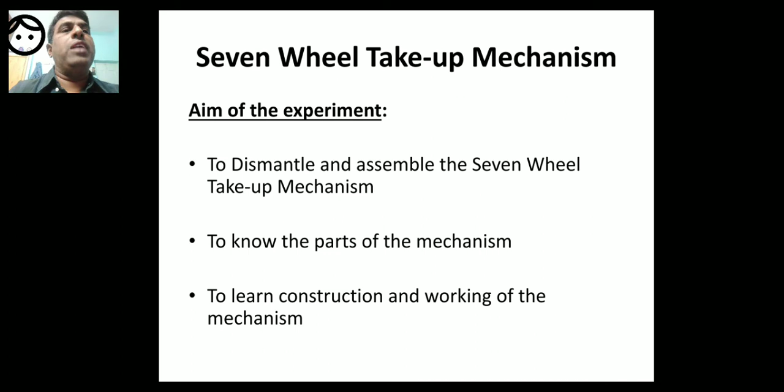So, dismantle and assemble the seven wheel take up mechanism, know the parts of the mechanism, learn the construction and working of the mechanism.

Principle of the experiment: in this positive type of take up motion, the cloth roller driven by means of a train of wheels draws the cloth forward at a regular speed with uniform pick spacing system. This is the principle of the experiment.

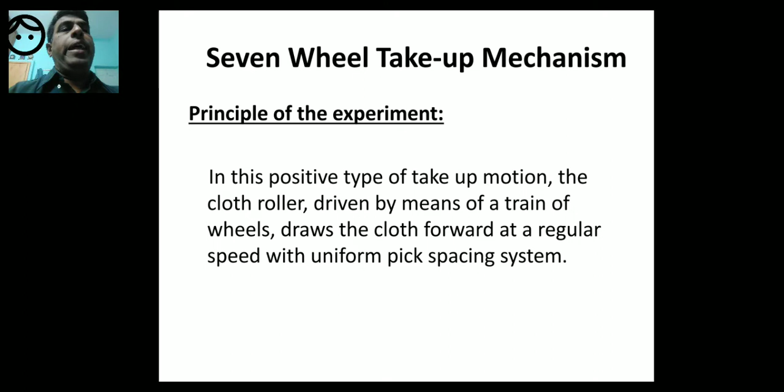So you have to understand some points in this positive type of take up mechanism. There will be a cloth roller which is driven by means of a train of wheels, that is seven wheels. It draws the cloth forward at a regular speed, a uniform speed, with uniform pick spacing system - the pick spacing will be uniform. So this is the principle, involving regular speed and uniform pick spacing system.

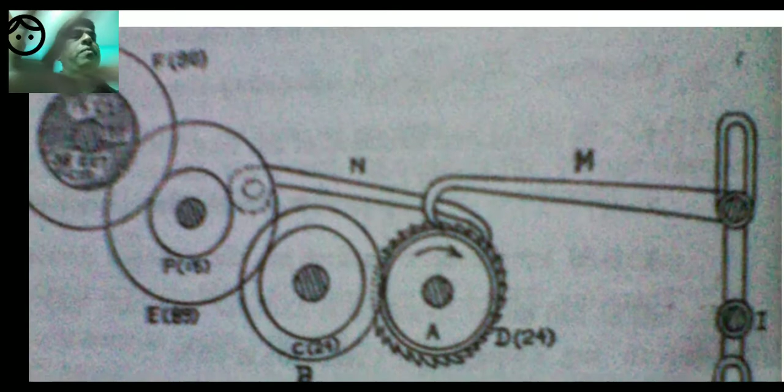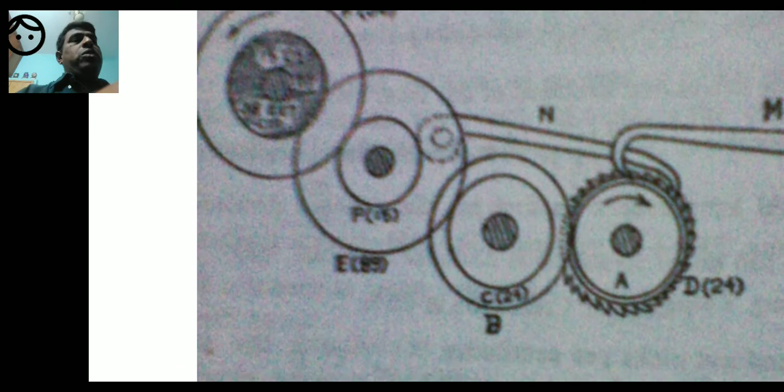So please see the parts. I will show you another picture where there will be a clear understanding of the parts. So these are the train of wheels, and M is the pulling pawl, N is the retaining pawl, and there will be 7 wheels if you observe clearly.

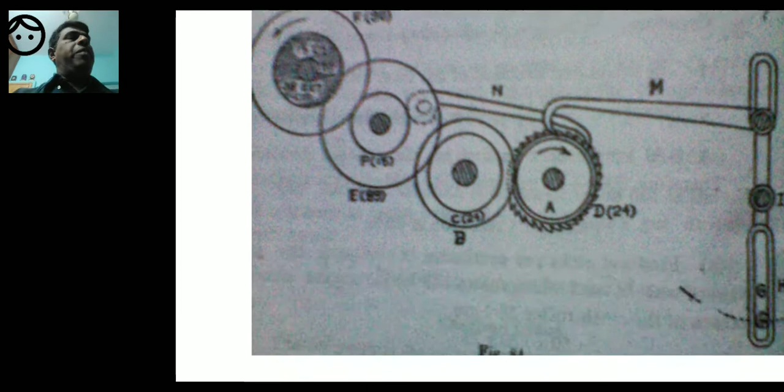I will show you another diagram. So take up lever, I is the take up lever. Let us go to the next diagram. So this is the next diagram.

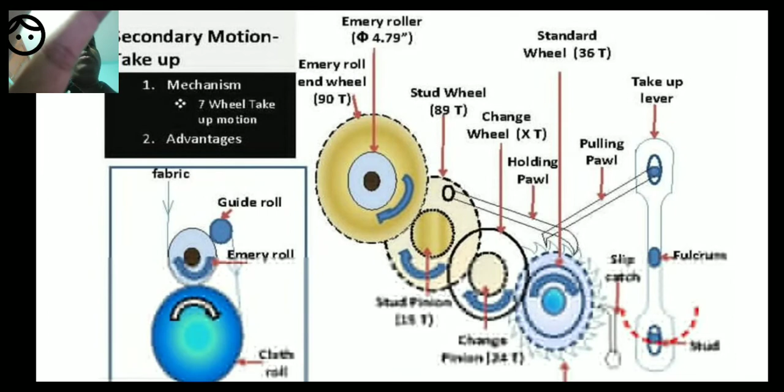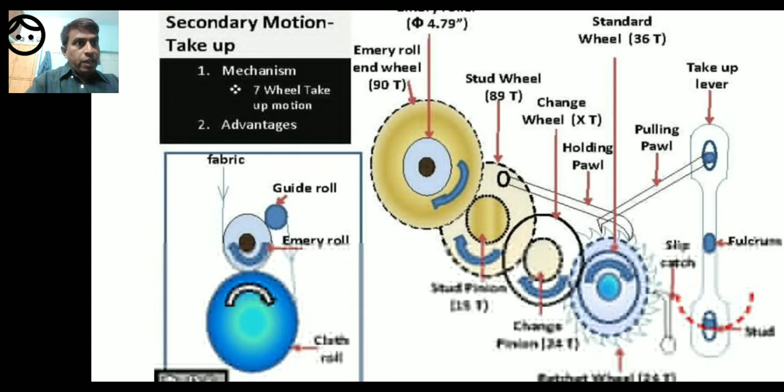So please see that, now you will see all these wheels. I am starting from the right hand top corner. Please see, take up lever, and then fulcrum. The below one is stud and slip catch, pulling pawl, holding pawl or retaining pawl, standard wheel which is of 36 teeth.

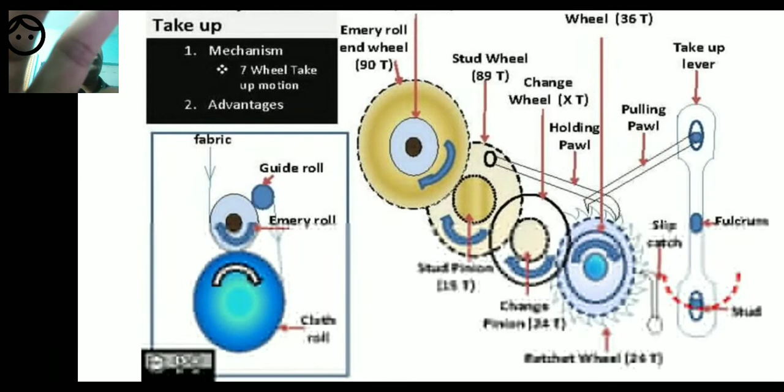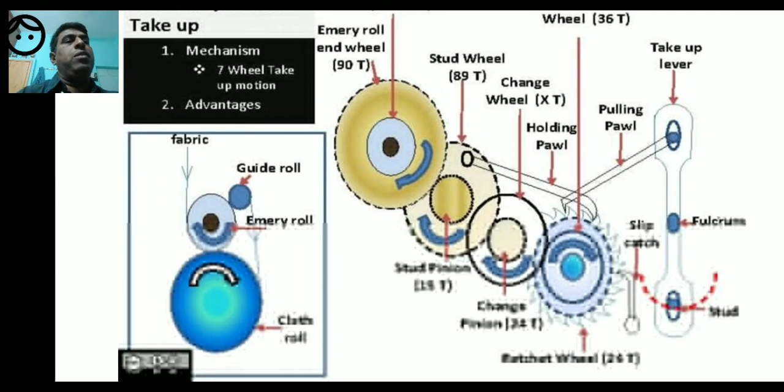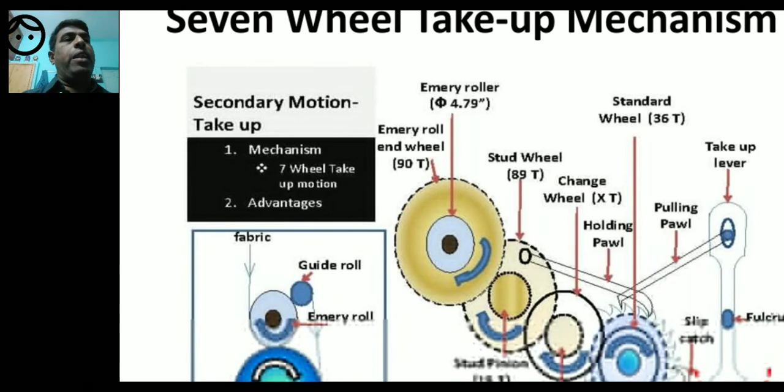Ratchet wheel, 24 teeth, change pinion 24 teeth, change wheel xt, so it means that multiplied by the change pinion. Stud pinion, stud wheel 89 teeth, stud pinion, I can't see this, so it is around 15 teeth. Emery roller diameter of 4.79 inches, emery roller end wheel 90 teeth.

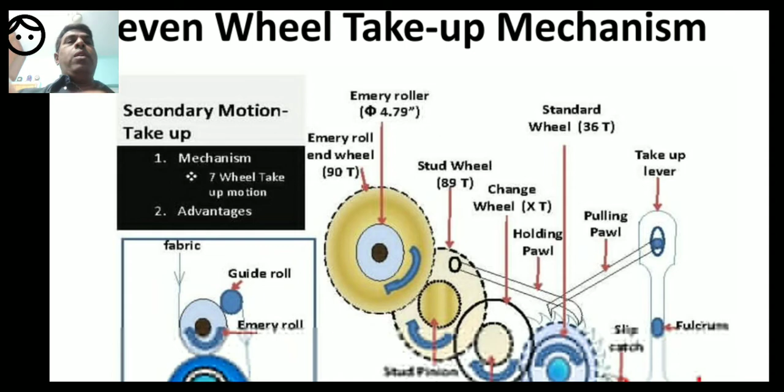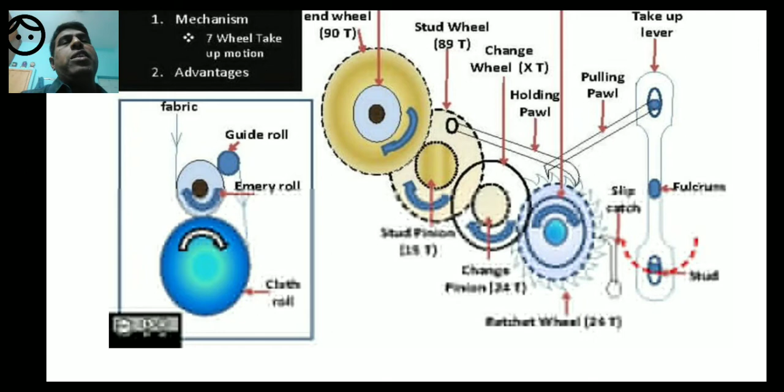And you see in this block diagram, the emery roller is there, and from the emery roller it goes on to the cloth roller with the help of the guide roller. The fabric passes on to the emery roller, and then after passing through the guide roller it passes to the cloth roller. So you may say, sir, where is the cloth roller here? That's why in this block diagram there is a small block where the cloth roller is given.

So the emery roller you have seen in the main diagram, and the emery roller is connected to the cloth roller via the guide roller. So please observe the parts. Take up lever, fulcrum, stud, pulling pawl, next holding pawl. Holding pawl can also be called retaining pawl.

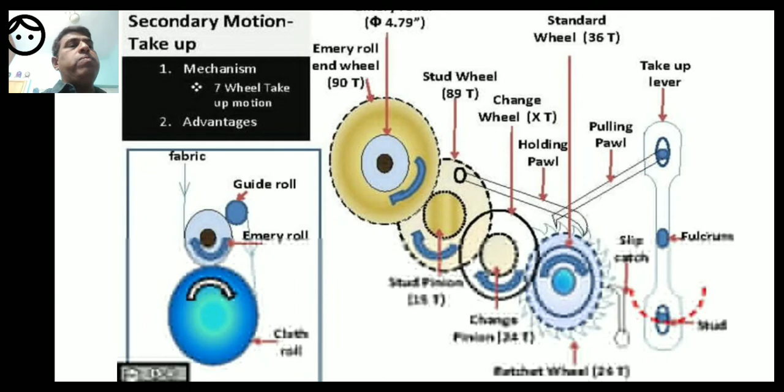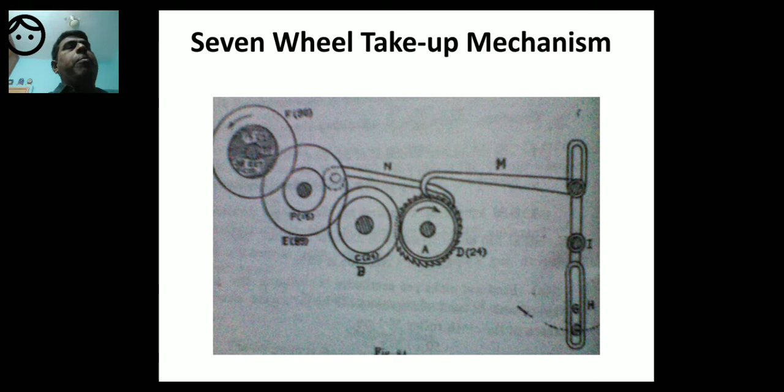Now we will talk about the wheels only. First, ratchet wheel, 2 standard wheel, 3 change wheel, 4 change pinion, 5 stud pinion, 6 stud wheel, 7 emery roller end wheel. These are the 7 wheels. In this diagram also it is similar, but this is a good diagram. So let's go with this.

So what are the 7 wheels? Ratchet wheel, standard wheel, change wheel, change pinion, stud wheel, stud pinion, emery roller end wheel, and on the emery roller end wheel there is an emery roller, which in turn is connected to the cloth roller. So these seven are wheels, and the emery roller is another roller. It's not a wheel. Emery roller is different. Emery roller end wheel is different.

So the emery roller end wheel is the seventh wheel in the seven wheel take up mechanism, and you have observed the number of teeth. Holding pawl and pulling pawl are two important points, and slip catch, we will study about slip catch also in the coming notes. The pulling pawl pulls like this, each one tooth, and the retaining or holding pawl will stop.

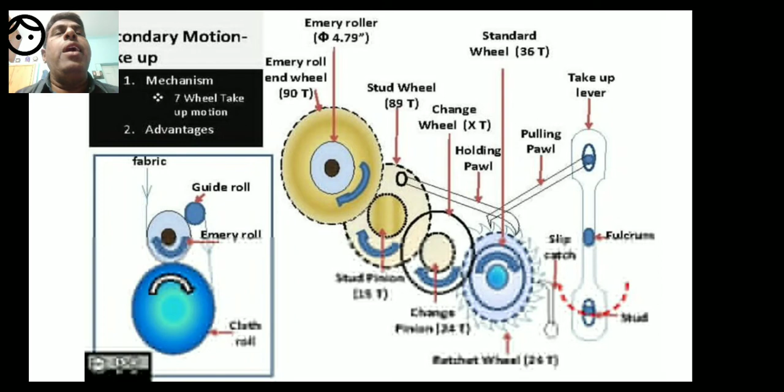Suppose the pulling pawl pulls one tooth, then the retaining pawl or holding pawl helps so that not more than one tooth is pulled. That is the function of the holding pawl or retaining pawl. Pulling pawl and holding pawl function together so that uniform or regular speed is maintained and uniform pick spacing is maintained. So we will study all these things. So one more time observe.

Emery roller end wheel. On that is mounted the emery roller, and in the block diagram on the left hand corner, the emery roller is connected to the cloth roller via the guide roller, through which the fabric is wound onto the cloth roller. So this is the complete picture of the take up mechanism.

Now construction. The motion to the take up starts at a stud fixed at the bottom of the sley sword. So at the bottom of the sley sword, right hand bottom corner, that is the stud. So observe, that is the stud. The motion to the take up starts at a stud fixed at the bottom of the sley sword. The stud is in the slot of the monkey tail lever or take up lever and carries a pulling pawl at its top end.

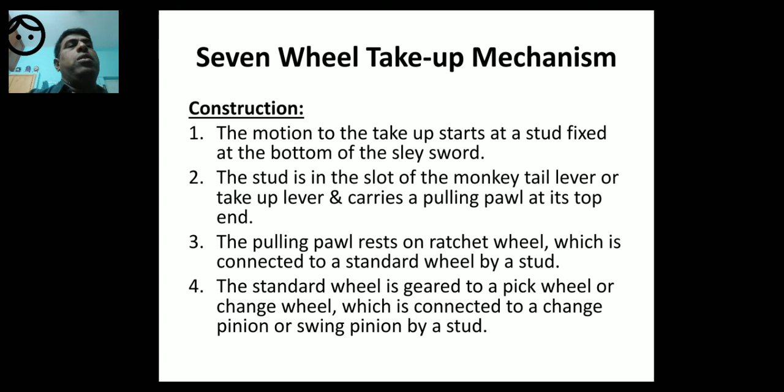So on the ratchet wheel there are three things: pulling pawl, holding pawl and a slip catch. All the three are present on the ratchet wheel. A holding pawl and a slip catch rest on the ratchet wheel. This is written in the 7th point, and in the third point it is written that pulling pawl rests on the ratchet wheel. So you can observe that a holding pawl and a slip catch rest on the ratchet wheel.

8th point. Cloth is drawn forward and passed over the emery roller, guide roller, and finally onto the cloth roller. The emery roller has frictional contact with the cloth roller. So cloth is drawn forward and passed over the emery roller. This I have shown you in the block diagram. So here the cloth is drawn forward through the emery roller and guide roller and cloth roller. So you can see that blue color cloth roller. So that's what he says.

Cloth is drawn forward and passed over the emery roller, guide roller, and finally onto the cloth roller. The emery roller has frictional contact with the cloth roller. Emery roller and cloth roller have a frictional contact with each other. Working.

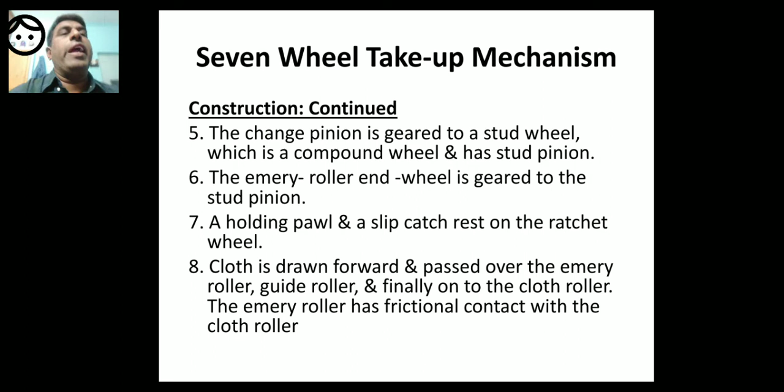I am getting tired. The sley moves forward during beat up. So the stud moves the bottom portion of the monkey tail lever forward. The pawl moves backward due to fulcrum and pulls one tooth on the ratchet wheel. From the ratchet wheel, the motion is transmitted to the emery roller through the train of wheels.

So the sley moves forward during beat up. So what is the function of the beat up here? After beat up, the last laid weft is pushed into the fell of the cloth. So after the beat up occurs, the cloth is drawn onto the cloth roller by the pulling action of the cloth roller. So the sleigh moves forward during beat up.

So the stud moves the bottom portion of the monkey tail lever forward. So by that motion, the bottom portion of the take up lever or monkey tail lever moves forward. The pawl moves backward due to fulcrum and pulls one tooth on the ratchet wheel. The pawl moves backward. Which pawl? Pulling pawl. The pawl moves backward due to fulcrum and pulls one tooth on the ratchet wheel.

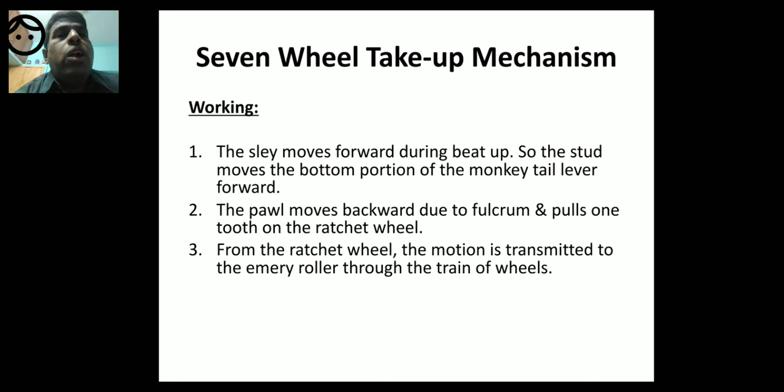And then from the emery roller end wheel, it moves to the emery roller, and then because of the frictional contact of the emery roller and cloth roller, with the help of the guide roller, the cloth is wound onto the cloth roller. So I will explain one more time anyway. The cloth roller, which is in frictional contact with the emery roller, rotates and takes up the cloth. So you might have understood the fourth point.

The cloth roller is in frictional contact with the emery roller. So the train of wheels ends with the emery roller end wheel, and as the emery roller end wheel rotates, the emery roller rotates, and because of the frictional contact of the emery roller and cloth roller, the cloth roller takes up the cloth.

Next point. The holding pawl holds the ratchet wheel to avoid overturning or slippage of the ratchet wheel. So please see this. The holding pawl or retaining pawl. There are two pawls, P-A-W-L. Holding pawl and pulling pawl. Holding pawl is also called retaining pawl. So pulling pawl pulls one tooth, whereas holding pawl holds the ratchet wheel to avoid overturning, so that it won't run more than one tooth.

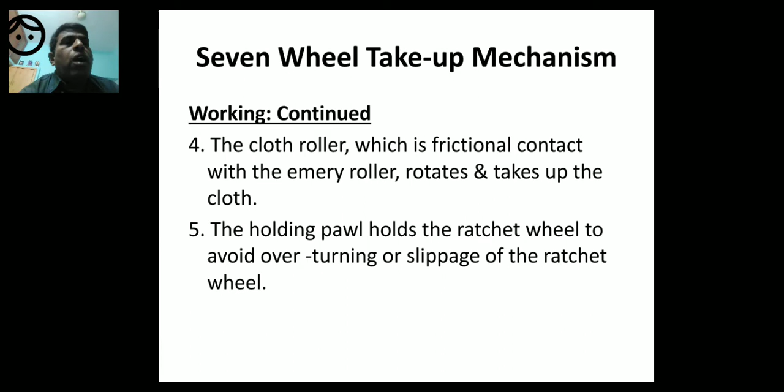So coming to settings, we are almost ending the class. Settings. The greater the number of teeth in the change wheel, the higher will be the picks per inch and vice versa. So if you want to change picks per inch, then you need to change or modify the change wheel. So if the change wheel has higher teeth, then picks per inch is higher, and if the change wheel has a lower number of teeth, then picks per inch will be lower.

So the change wheel is one of the important wheels in the 7-wheel take-up mechanism. The change wheel decides the picks per inch. If the number of teeth is more, picks per inch are more. If the number of teeth is less, picks per inch is less.

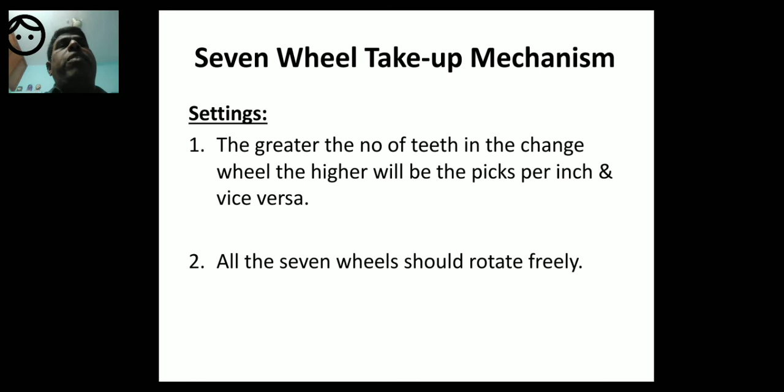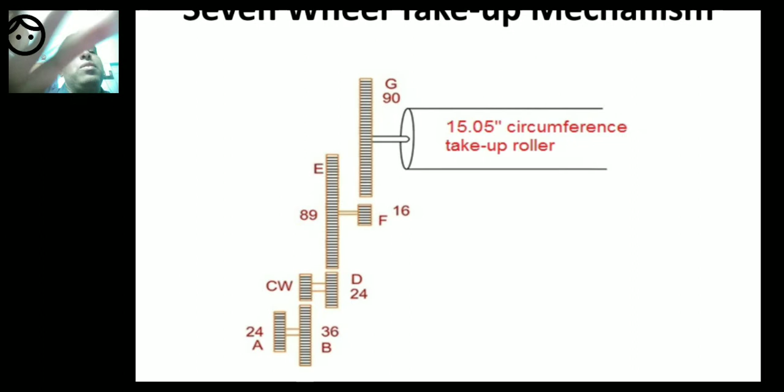So here you see the gearing diagram of the 7-wheel take-up mechanism. Here it is clearly given. A is the ratchet wheel, B is the standard wheel, CW is the change wheel, D is the change pinion or swing pinion.

To that is connected the stud wheel of 89 teeth. E is the stud wheel and F is the stud pinion, and then it is connected to the emery roller end wheel, which is known as G. The other parts are not given, and the take-up roller has a circumference of 15.05 inches.

So what are the wheels? A, ratchet wheel, 24 teeth; B, standard wheel, 36 teeth; change wheel CW. The change wheel decides PPI, picks per inch. If the number of teeth on the change wheel is high, then picks per inch is high. If the number of teeth on the change wheel is less, then PPI is less.

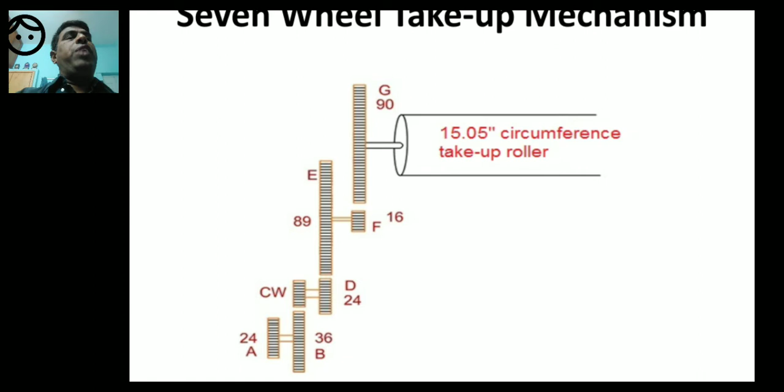The emery roller end wheel has 90 teeth, and it is written as G, and it works with the help of the emery roller and cloth roller. The circumference of the take-up roller is 15.05 inches. So these are the 7 wheels.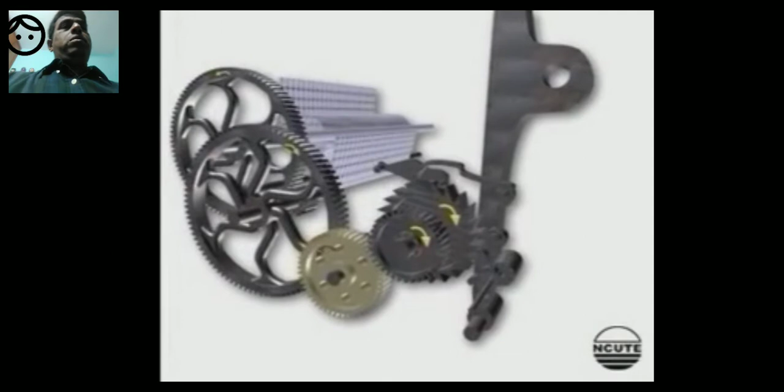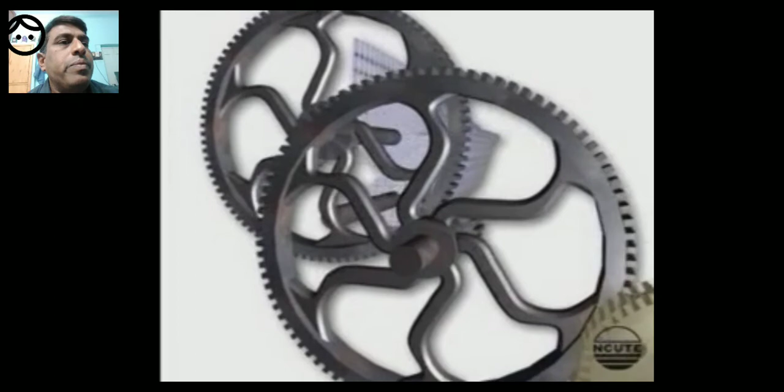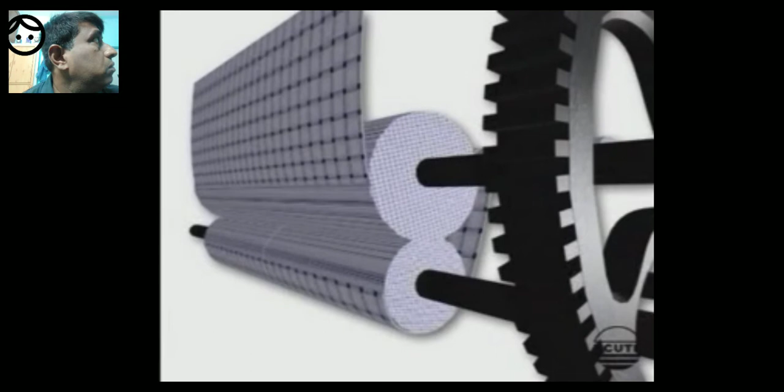This is a positive intermittent motion. The sley stud oscillates to and fro. The take-up lever also moves similarly to and fro. When the take-up lever moves to the right, the pawl pulls one tooth of the ratchet wheel. This happens when the crank is at the front center. This action rotates the other wheels and finally the emery roller. The cloth roller in contact with the emery roller then rotates and takes up the cloth.

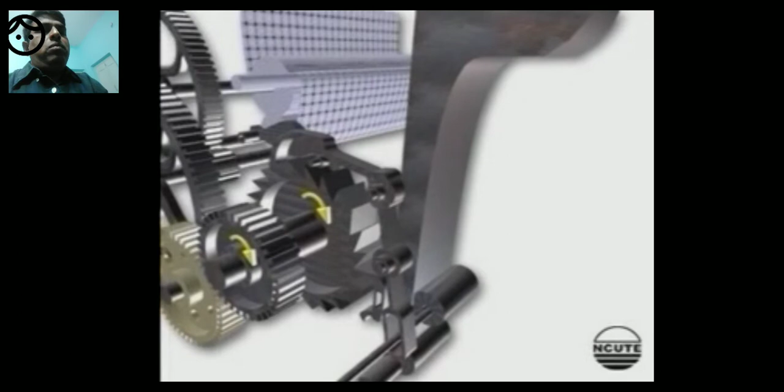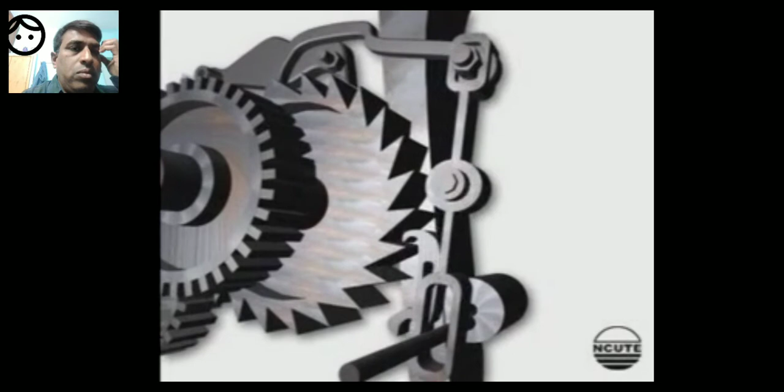This mechanism is positive and involves 7 wheels. The picks per inch in the fabric can be altered by using the appropriate change wheel. This mechanism is popular in industry because the number of teeth in the change wheel directly indicates the number of picks per inch in the cloth.

See one more time, I will explain in between.

This is a positive intermittent motion. The sley stud oscillates to and fro. The take-up lever also moves similarly to and fro.

Take-up lever moves to and fro. That means like this, like this.

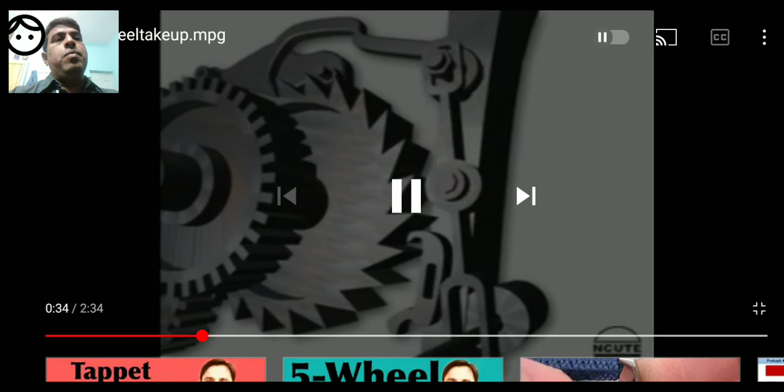When the take-up lever moves to the right, the pawl pulls one tooth of the ratchet wheel.

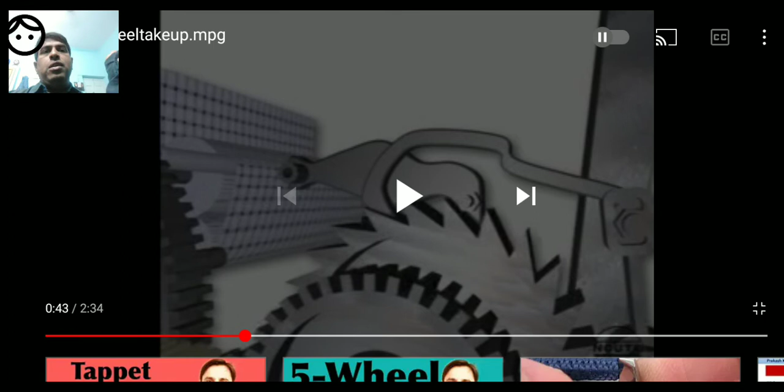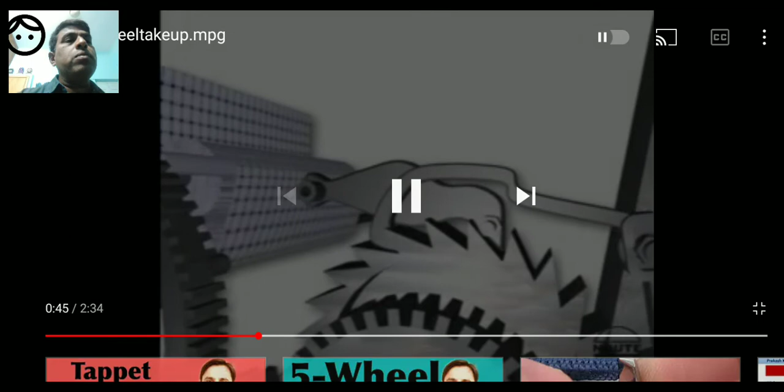When the take-up lever moves to the right, take-up lever is like this. When it moves to the right, the pulling pawl pulls one tooth of the ratchet wheel. And here he has not explained the retaining pawl, so please observe that there is a retaining pawl or holding pawl which stops overturning or slippage of the ratchet wheel.

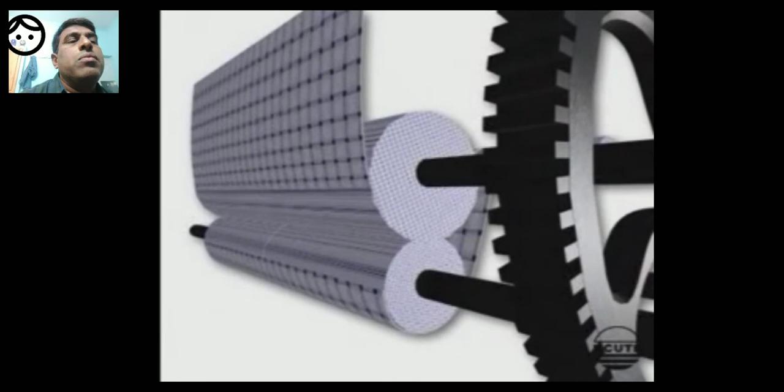This happens when the crank is at the front center. This action rotates the other wheels and finally the emery roller. The cloth roller in contact with the emery roller then rotates and takes up the cloth.

The cloth roller is in frictional contact with the emery roller.

This mechanism is positive and involves 7 wheels. The picks per inch in the fabric can be altered by using the appropriate change wheel.

Picks per inch can be altered by using the appropriate change wheel. Actually, the number of teeth on the change wheel is equal to the picks per inch in the fabric.

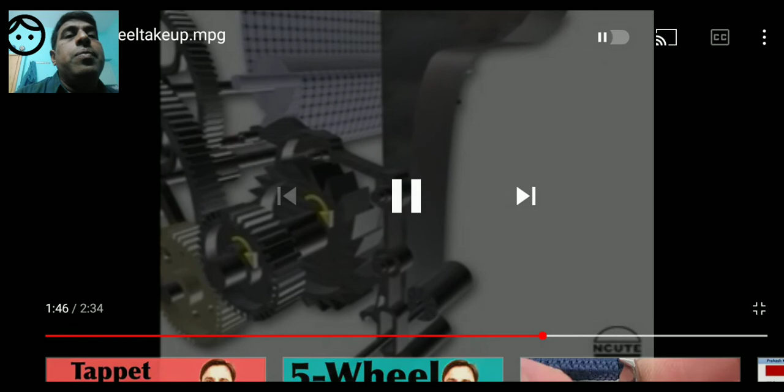...because the number of teeth in the change wheel directly indicates the number of picks per inch in the cloth.

It directly indicates the number of picks.

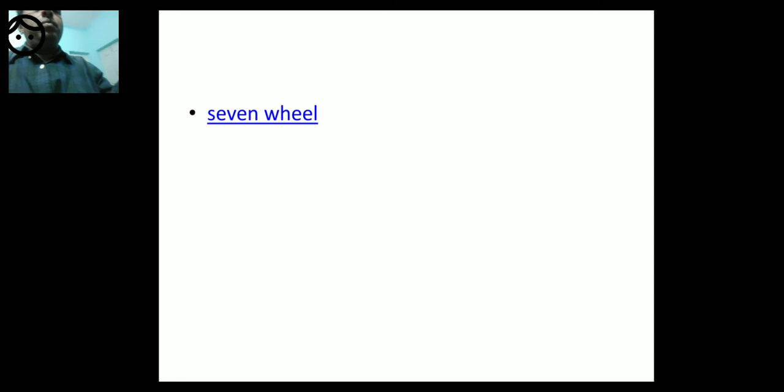This is another video showing the 7-wheel take-up mechanism. I hope it is a different one. It is the same one. This is a positive intermittent motion.

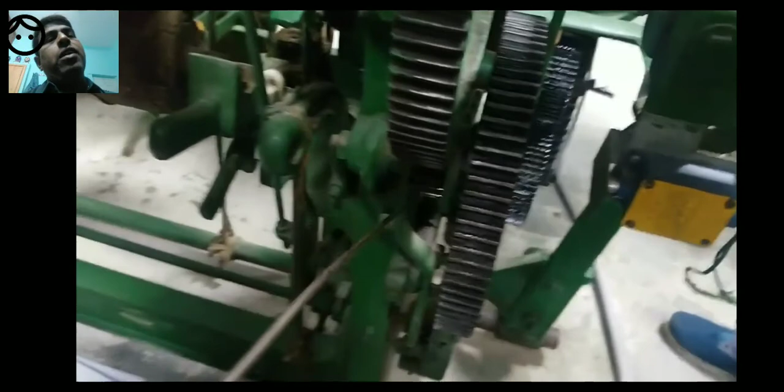You see, emery roller and cloth roller are in frictional contact with each other. So thank you. Thank you to the video people. They have done an excellent job, it eases our job.

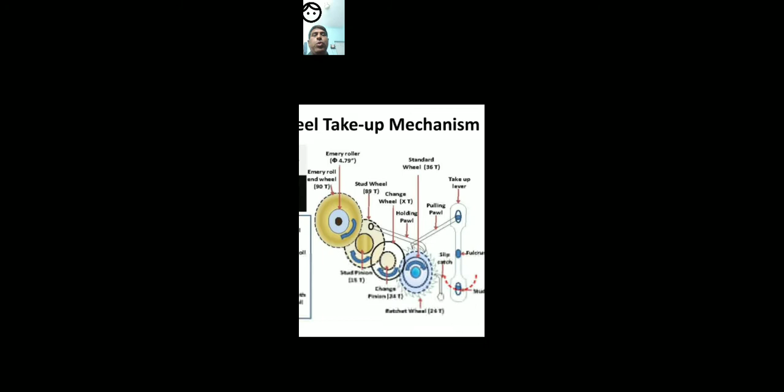So dear students, I will explain one more time the construction and working. So please observe. There is a take-up lever, fulcrum and stud, and on the take-up lever there is a pulling pawl, and the pulling pawl is resting on the ratchet wheel. The ratchet wheel is geared to the standard wheel, and there is a holding pawl which helps prevent overturning of the ratchet wheel when the pulling pawl pulls one tooth of the wheel, and the slip catch also helps in this function.

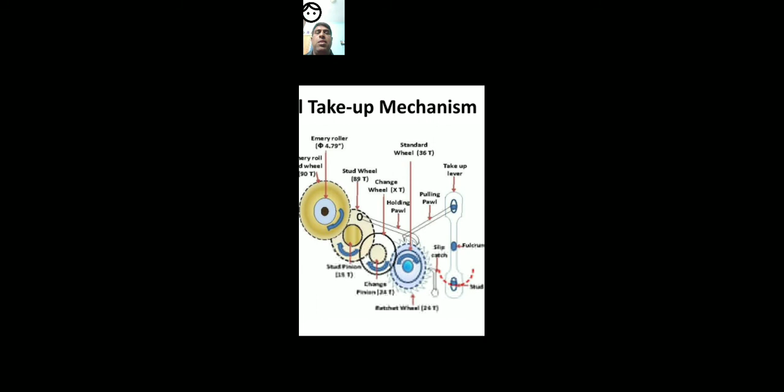After that we have the change wheel and change pinion. The change wheel is also known as the pick wheel. The change pinion is also known as the swing pinion, and after that they are geared to the stud wheel and stud pinion, and it is geared to the emery roller end wheel. On the emery roller end wheel lies the emery roller, and the emery roller is in frictional contact with the cloth roller via the guide roll.

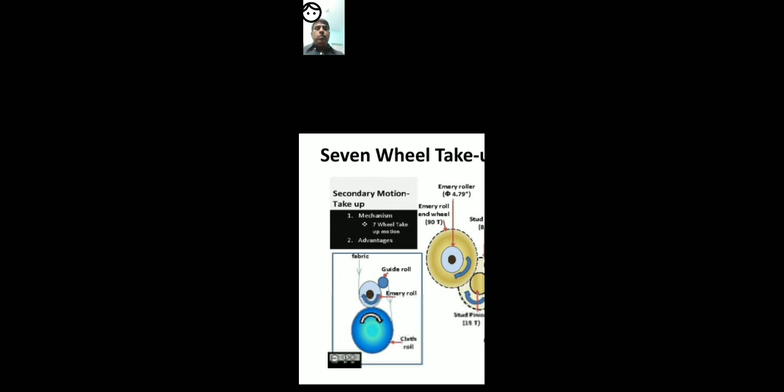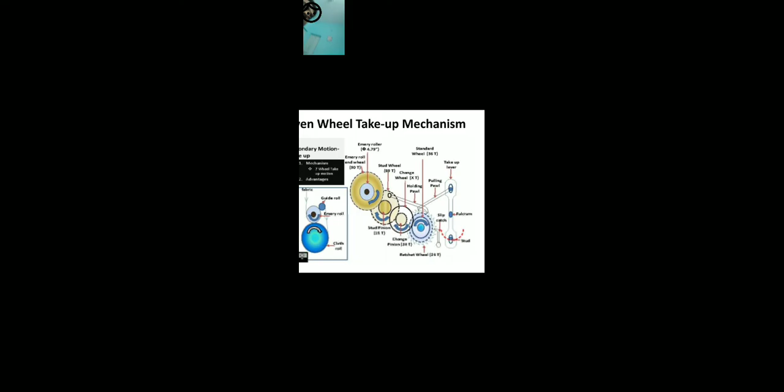So the fabric is wound onto the cloth roller with the help of the emery roller and the train of wheels. So what are the train of wheels? 7 wheels. That's why it is called the 7 wheel take-up mechanism. So I am summing it up. What are those 7 wheels? Ratchet wheel, standard wheel, change wheel, change pinion, stud wheel, stud pinion, emery roller end wheel. All the students are expected to know the 7 wheels and sometimes even the number of teeth also. Those are the 7 wheels.

And what is the function of the pulling pawl? It pulls one tooth of the ratchet wheel and thereby motion is transmitted to the train of wheels. And to avoid overturning of the ratchet wheel, a holding pawl or retaining pawl is placed over the ratchet wheel. So this is about the 7 wheel take-up mechanism.

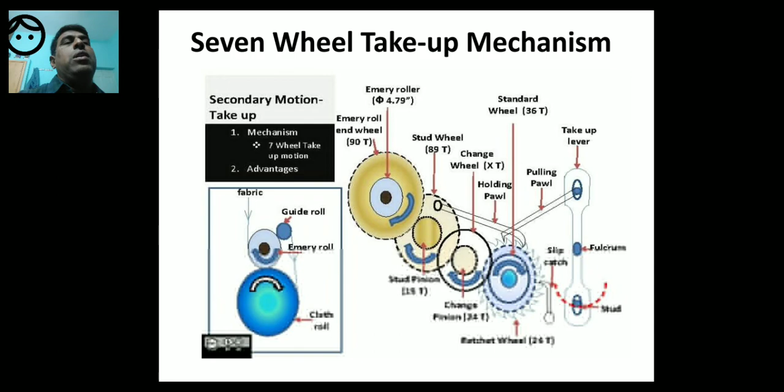And one important thing: in this diagram, please observe CW. This is one viva question you may expect in exams. CW means change wheel. Suppose the change wheel has 80 teeth, then PPI is 80. If the change wheel is 79, then PPI is 79. This is an important question in the lab viva exam. So the number of teeth in the change wheel is equal to the picks per inch in the fabric. That's how it is decided.

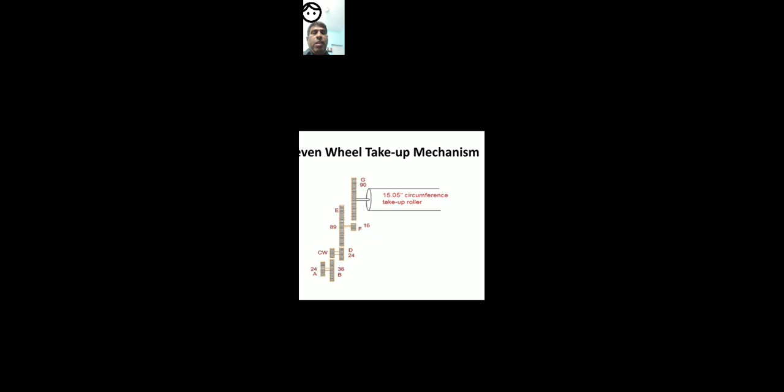So if the picks per inch is more, the change wheel has more teeth. If the picks per inch is less, the change wheel has fewer teeth. With that I will conclude the class, and I will play the video one more time for the better understanding of all students. This is the last time I will be playing this video, and after that you can search on YouTube to find the video. So please see the video.